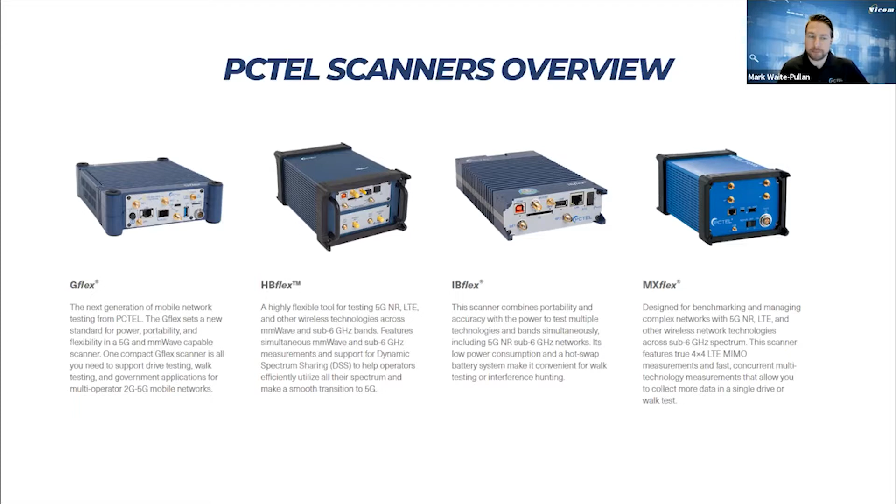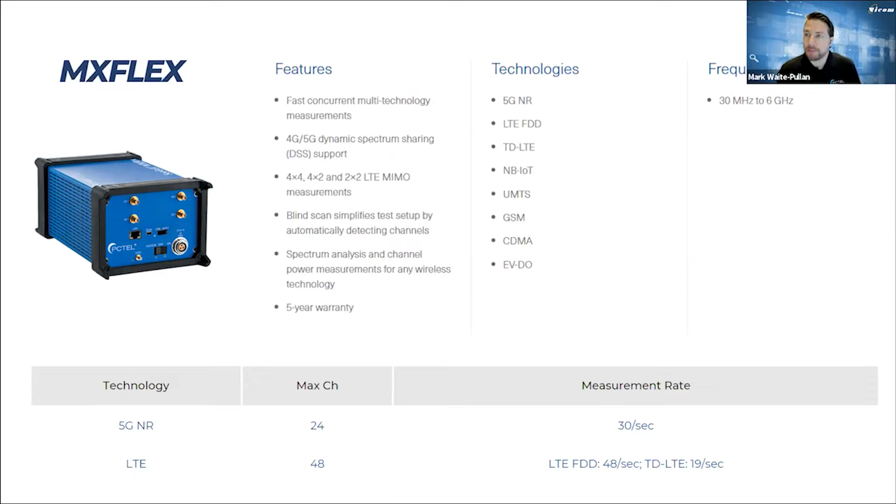So the first one is MXflex. The main thing with MXflex is it only supports 6 gigahertz down. It does support 5G, but obviously it's only going to be below 6 gigahertz. However, it does have 4 antenna inputs, so we can do 4x4 MIMO measurements. This one's particularly aimed at your cellular industry, hence no support for the public safety radio. And you can look at this measurement rate. We're looking at 24 5G carriers at one time, measuring 30 times per second. So it's quite a powerful device.

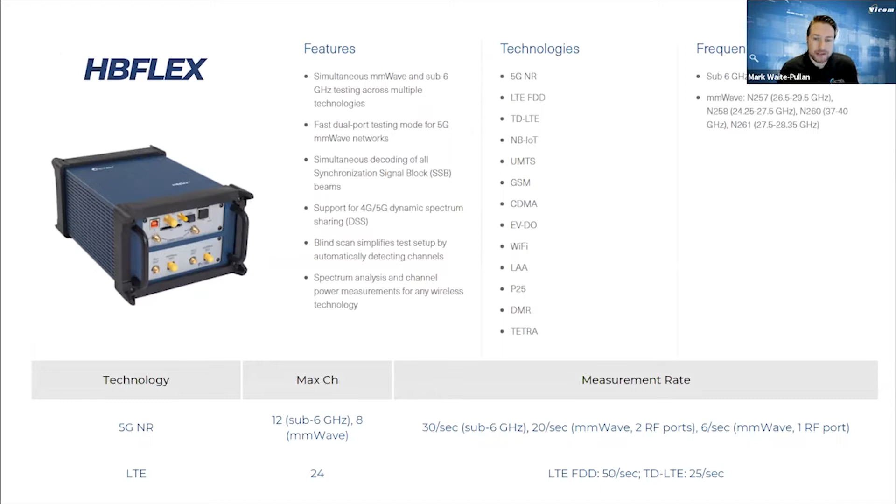HBflex. HBflex adds the public safety technologies, but it also adds extended frequency range. So now we're looking at millimeter wave. We can get up to 40 gigahertz depending on the model selected. You can see though that the scanning rate of those 5G carriers, the maximum number of channels, is lowered slightly.

And the latest one is the G-Flex. The G-Flex, this is 120 5G carriers simultaneously. If you're talking sub 6 gigs, it's doing that 33 times a second, or 25 times a second for the millimeter wave. With millimeter wave here, it is a continuous spectrum, and we can go all the way up to 48 gigahertz. So this, again, is really for your network engineer level in-building DAS market. This one does not support any public safety.

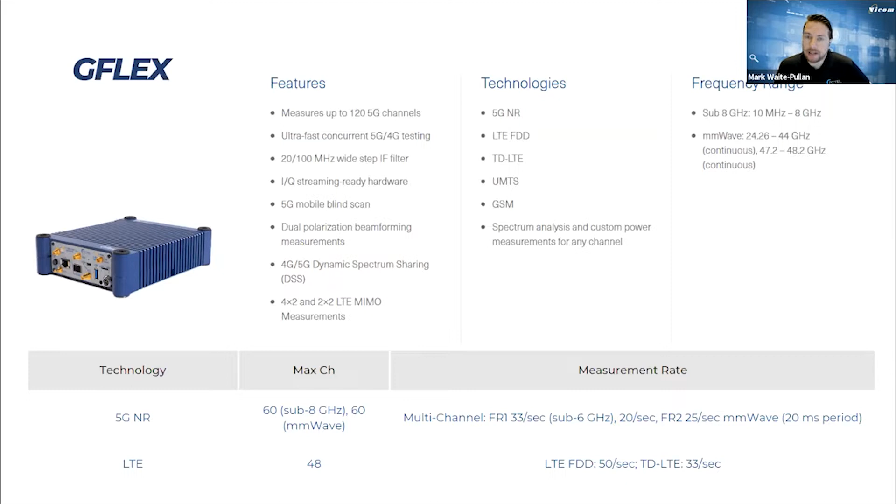Okay, so what we're looking at now is ibFlex, and this is a main product that we've been showing. We've had agencies purchase this product already, and it kind of does a little bit of everything. So it supports 5G only up to 6 gigahertz, so FR1. It supports all your two-way radio technologies, well, not all of them, but DMR and Tetra. Supports P25. We can do 4G scanning, 2G, GSM, even your digital train radio system, GSMR, CDMA.

Now it has 2 antenna inputs, so it can support MIMO as well. So 2x2 or 4x2. One of the things about ibFlex is it's very small. I'll show you my unit, which I have on my desk behind me for today's demo. Let's see if I just quickly turn my. Sorry, I can't see it because of the background. But it's a very small, compact unit. It's very lightweight to take around.

And the main thing with this unit is the amount of carriers we can support at once. So if I speak from two-way radio world, we can support 20 P25 carriers at once. So this is really the advantage of this over some of the traditional coverage testing methods we have available for digital radio. Most of those are only supporting 1 carrier at a time. So if you're walking a 60-story building and you want to look at the in-building system as well as the half a dozen macro sites that the building can see, this saves a heck of a lot of time.

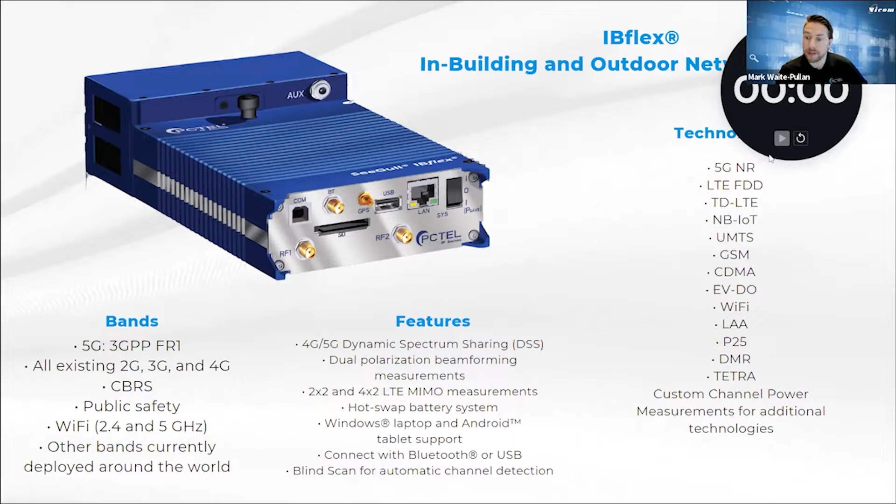So part of the PCTel range is you obviously have the scanners, which are the physical device collecting the data. Then you have the software which aids in that collection and gives you the graphical representation of it. So the first piece of software we have over here is SeeHawk Touch. So SeeHawk Touch is Android based. So you can walk around on your tablet or mobile phone, but obviously a tablet is a better viewing platform.

It pairs via Bluetooth to the scanner, so you have no cables hindering you while you're walking around. It gives you simple reports in real time. You can look at KPIs as you're walking around, and it gives you simple playback. When I say simple, what I mean is, while we might be taking samples of multiple channels and multiple technologies, we can only visualize one of those on a map at a time. You'll see when I jump into the demonstration soon what that looks like.

The next one above is called SeeHawk Collect. This one is PC based, and this is wired to the scanner, either via the Ethernet port or via USB. It gives you the ability to analyze it more in depth. So you can have multiple maps showing multiple bits of information. And it also enables automated reporting, so that the data that's collected via SeeHawk Touch can be imported straight into SeeHawk Collect, and then automated reports can be generated. We'll look at that a bit later as well.

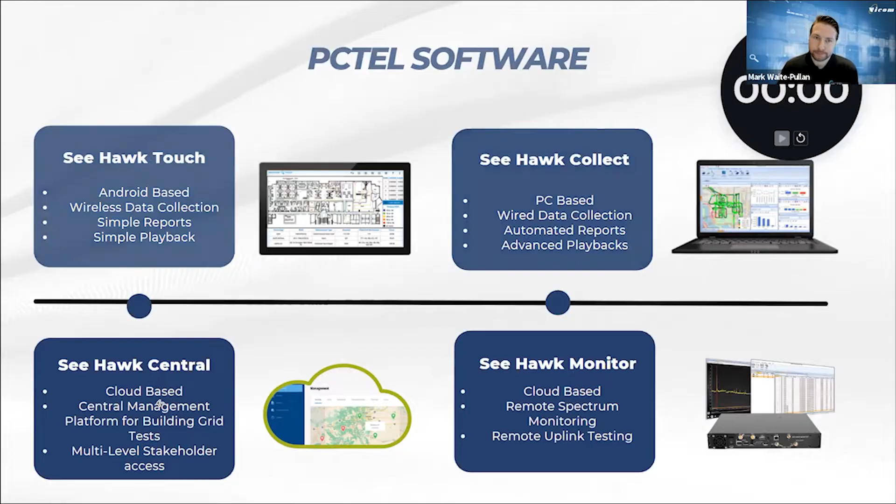Okay, so the types of tests that we're supporting with the SeeHawk software: we have the indoor tests, which are not GPS based. So this is simply import a floor plan, touch where you are, start recording. When you get to the next location, you touch on the tablet again, and it shows you where you are and populates those readings in between.

So one of the advantages of the SeeHawk indoor testing is you don't have to spend any time creating the building before you arrive. There are other solutions out there which do some fancy looking maps, but they require hours of work before you arrive at site in drawing the building in 3D and importing the plans. With SeeHawk Touch, we can just import a drawing and scale it on the tablet within 10 seconds, and we can get moving. We can even take a photo and scale that photo.

So maybe you might turn up to a facility and they have an evacuation plan. Take a photo of the evacuation plan. Then you've got your floor plan to start doing your walk tests. So no prior preparation required.

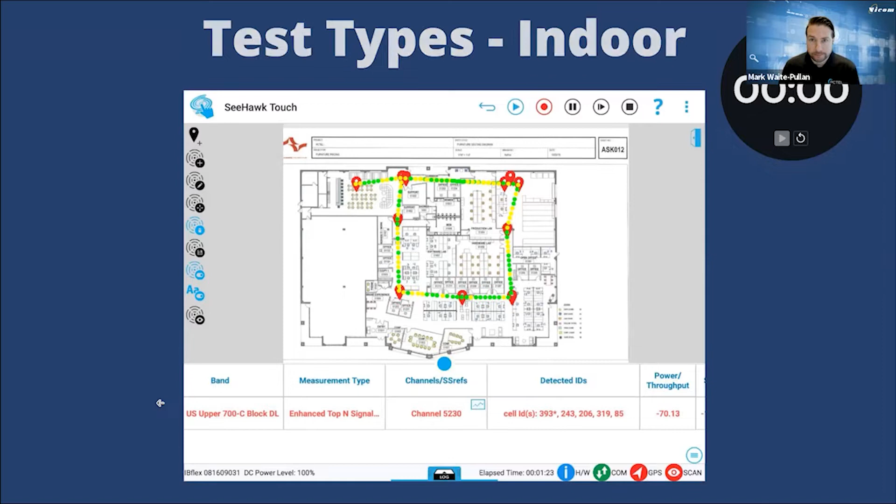We have your typical outdoor test, which is GPS. As you drive, it's going to log, plot and record the signals that you've asked it to. The speed of this is going to depend on what type of reporting you've asked the unit to do. So if we're talking about signal strength only, we're going to have very high speed, something like 25,000 channels a second it's capable of.

If we're talking about decoding, which is demodulating the signal and having a look at what's inside that signal, we're talking 30 or 40 samples a second, depending on the technology. We'll have a look at that in a moment. So moving at high speeds isn't an issue.

So you would walk to each point, press on the dot, and then it'll take samples for as long as you like. Then you add it to the report, and then it grades that square. The reason why this goes so well in the US is that a report is able to be created right there and then, and simplified for building owners to understand.

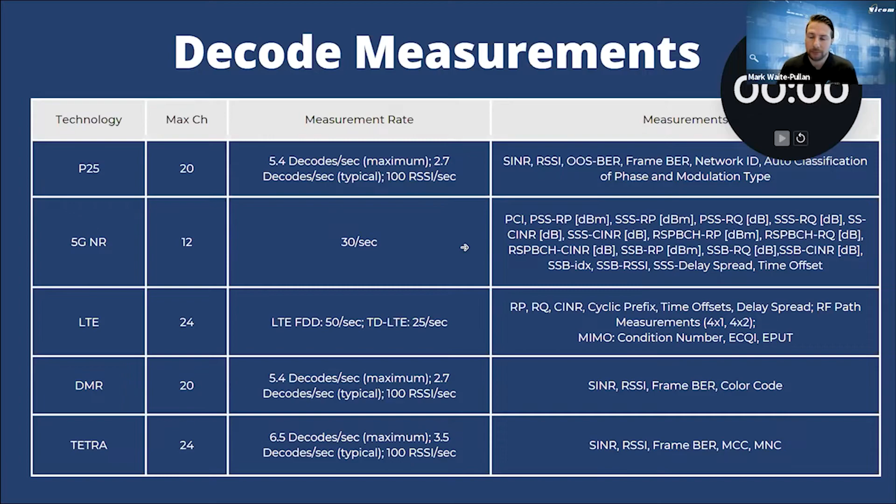So one of the things with the PCTel that is misunderstood a little bit is that it is very powerful for power measurements. So if you only want to look at the RSSI, for example, if you wanted to use this to tune a propagation model, there's no point decoding bit error rate or signal to noise, because that's not part of the model. You're only looking at the power output.

And if you're doing that sort of work, you're going to want a lot of samples to give you some confidence in your model. We can take thousands of samples a second. So we're talking on a 12.5 kilohertz radio channel, 25,000 channels simultaneously. Specifically, if we go RSSI on P25, we can look at 2,560 channels with the tablet software, which is more than enough.

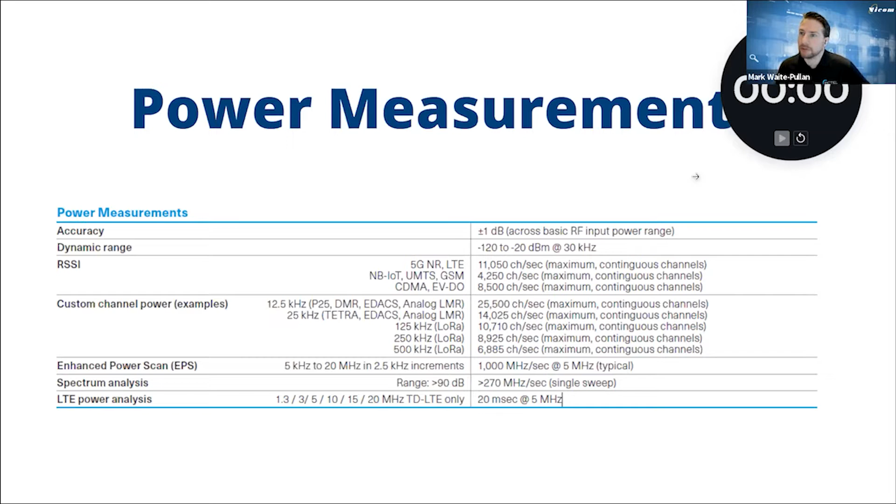So any technology that you might have that's not included natively in the PCTel to decode, you can still measure that just by looking at the RSSI. So that might be NXDN for the radio world or some other technology that's not listed here.

Okay, one of the things that sets the PCTel product apart is Blindscan. The idea of Blindscan is when we're looking at the cellular carriers, we might be a radio professional who's been asked to evaluate the 4G coverage in a building. Or maybe we're looking at installing cellular boosters, which are becoming quite popular in the industry. Maybe we're doing a larger micro cell installation. We need to have a look at what coverage is already there from all the carriers.

Blindscan allows you to select the band and the technology. So you might select LTE for 4G and band 28 for some of the Australian frequencies. Blindscan will then run in the background and it'll tell you the frequencies that those services are on, the bandwidths. So then it can set up the measurement for you without you knowing which specific channels are active and the bandwidth of those channels. The table I've got up here is just explaining the Blindscan modes.

So blind scanning takes time. So the PCTel has a high-speed mode. The idea of the high-speed mode is I can put it in my unit and I can just start walking around and scanning the entire coverage area for what services are there. However, it's not going to pick up really low signals. It's going to favor high signals better than -85.

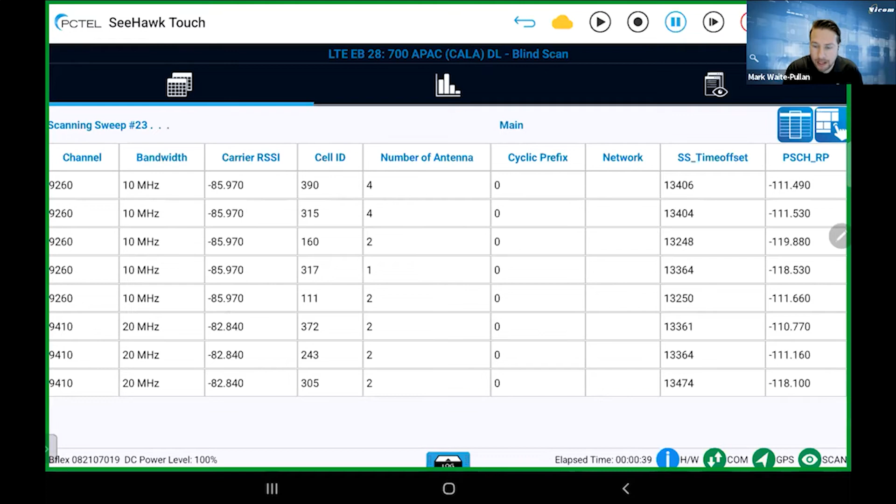We might want to have a look at this in a table form. So I've got all my green channels, which are Telstra, and I've got all my blue channels, which are Optus. I can look at it as a scan mode or just a summary. So it's not moving all the time. It's just telling me which ones are the better ones at this point in time.

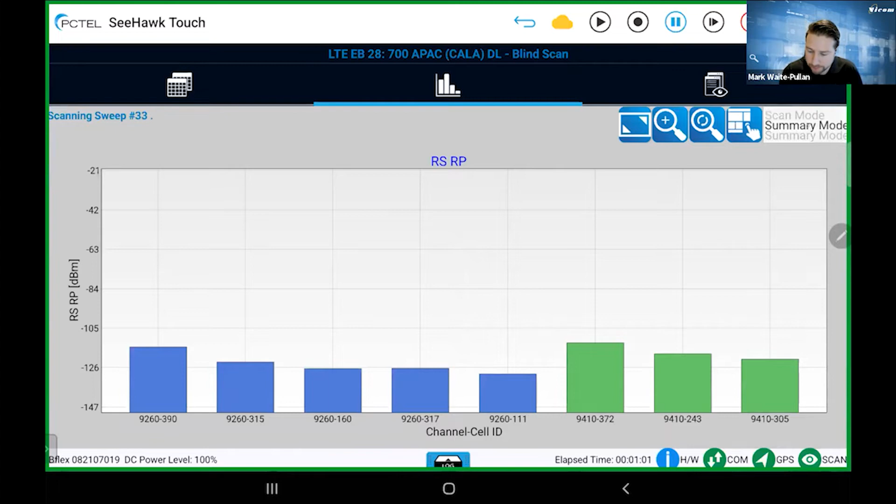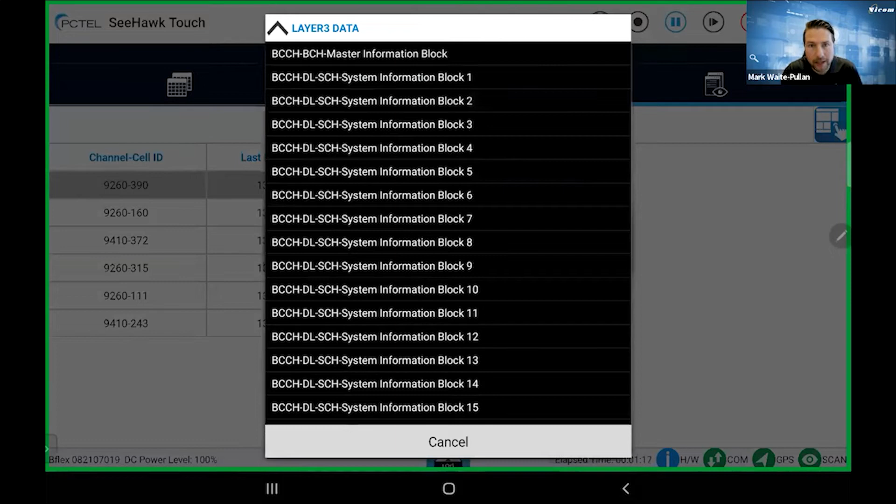How do I know that these are Telstra and Optus? If I look at the data, so this 9260 channel here, I can look at the data and I'm getting all the data blocks from that carrier as well. So in block 1, this is where you're going to find the MNC. So number 2 in Australia is Optus. So that 9260 channel is Optus. That 9410 channel, that's number 1, that's Telstra.

Okay, so this has told me what channels I have in the area on that band that I've specified. Where blind scan is really useful is if I stop this now, it's going to ask me if I want to save it. I don't. I'll delete that.

Now the Blindscan wizard will basically automatically set up my tablet to go and do a full measurement of my Blindscan results. So it's going to say, well, here's your detections. And I detected this channel here 54 times and the other one 53. So I might have 20 channels that appear, but maybe I only see 1 or 2 times out of the 100 scans I did. I can then filter that based on, hey, show me only the ones we saw 54 times.

So if I need to get my list smaller I can, but what we're going to do, we're just going to select them all. So just tick that box for the entire band and apply. It's taken us back to the measurement screen. Doesn't look like anything's happened, but if we actually look on this measurement tab, you can see it's now set up the proper channel number, the proper bandwidth, ready to go for the measurement.

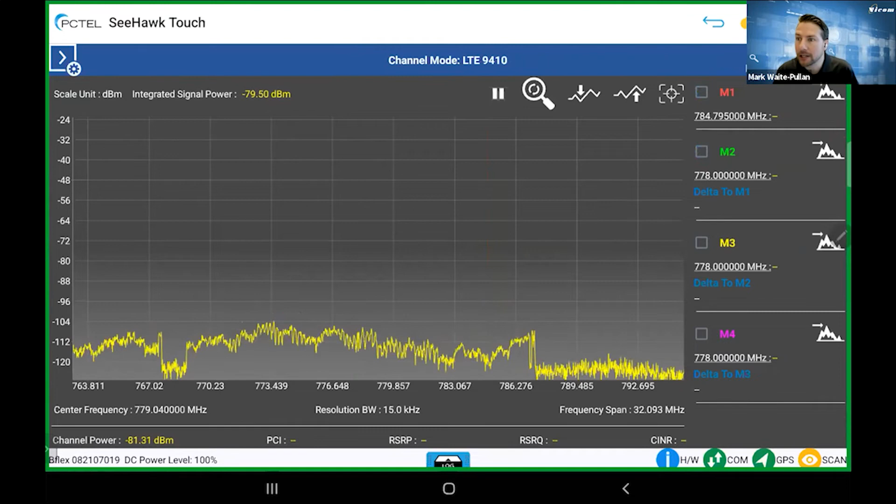Okay, I'm going to stop this scan. Okay, we're going to go back to our main screen. So these are how you set up your measurements. There's a lot of other options, depending on the technology. So if I take P25, we don't have bands as such for the radios. So we have to put a frequency list in. There are two ways to do this.

One is I can put a frequency list of uniform, which is start at frequency X, have a 12.5 kilohertz span, and then say how many channels we're going to go up to. So for P25, it's 2,560. So then it's automatically created this channel list for me. That might work if you've got the whole block to yourself, but that's generally not how two-way radio is licensed in Australia.

So generally what you want to do is a non-uniform. With non-uniform, you start by adding a frequency, giving it a channel number, and then putting in what that frequency is. A lot of the operators are going to have quite a large list of frequencies for the two-way radio technology. So you can simply import a channel list. So I've got this P25 list here, and the CSV is as simple as channel number followed by frequency. So these are all the channel numbers and the frequencies. If I hit import, it's going to bring them into my channel list.

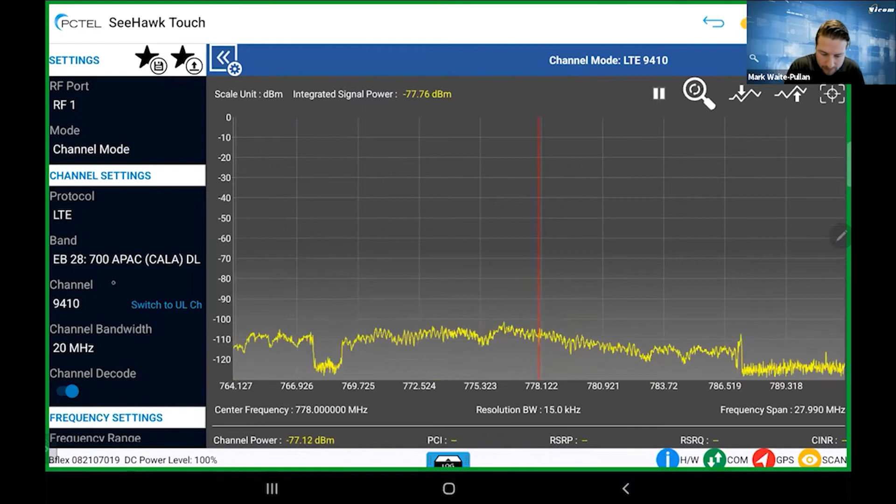Also, while we set it up as well, you can have a look at the spectrum analyzer and have a look at certain channels while you're setting it up, by selecting which type of protocol, which channel. Obviously, I'm inside here, so I'm picking up nothing.

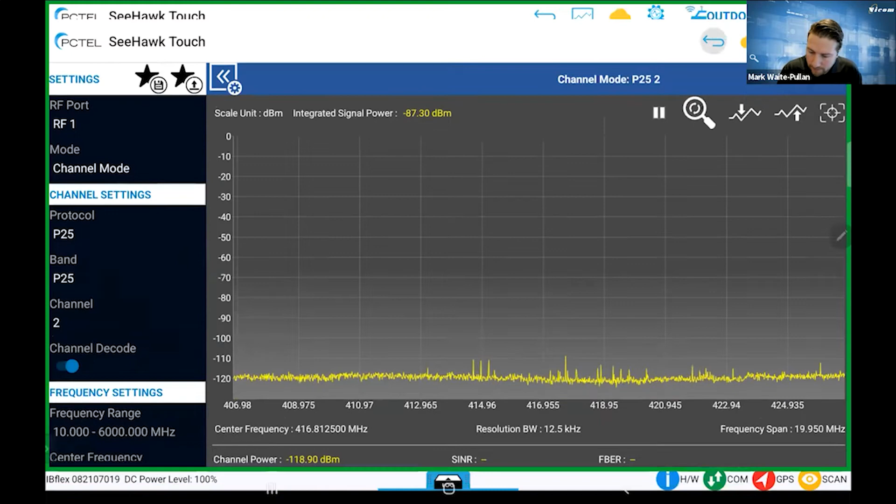Okay. So what I will quickly do is show you some tests. So once we've collected all this data, how can we look at it and analyze it? On the tablet, it's kind of simplified. So I've got a drive test that I've done here. I've got two options. I can play it back, or I can just have a quick view just to get a quick report on a particular parameter. So I'm just going to hit playback.

And these are all the services I was looking at in this particular drive test. So this is going to ask me which one do I want to see. So I might say I want this DMR system. You see I've got 5G there. I've got 4G. I've even got the train rail system because I was close to a train station. Okay, I'm going to look at the bit error rate of this DMR channel.

So here's my view. The blue is the route I took while I was driving. So I've got a mix of freeway driving at 110 as well as around residential areas. So I can select down here the speed that I play this back at. So we're going to go 8 times the speed and we're going to hit play. So if I drag this dot up, you can see my table of all the measurements that I'm taking and how quickly they're being plotted and sampled.

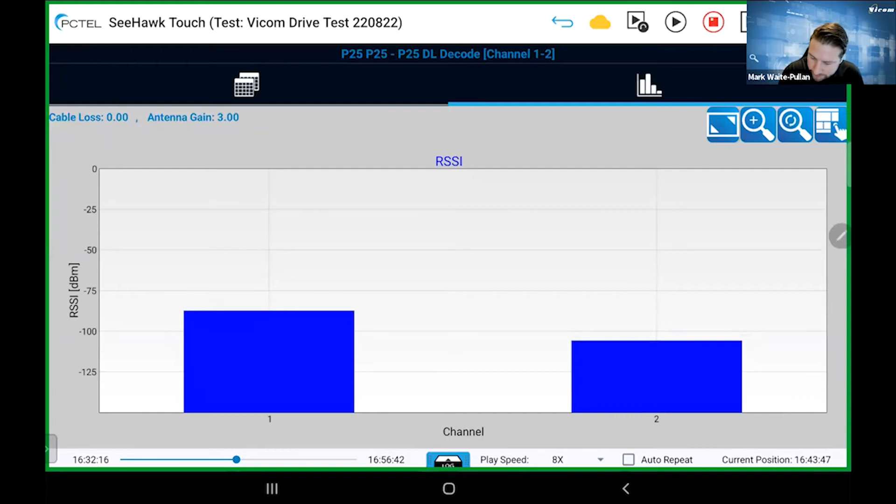One of the other things we can look at is just do a quick view. So let's say from that drive test, I want to know what the 5G signal was like. I can now select my 5G. And you can see the amount of items we can look at when we're looking at a 5G signal. I want to know what was the best serving cell ID and what was the beam index of that cell.

And I want to label that. Well, I'm not actually going to show a label on this one. You don't have to show a label. If you want to do a report to show a client, sometimes the labels get in the way.

So what we're seeing here is I've got nice multicolored dots. If we click on my key over here, we're getting the key. So the best serving cell ID was this light blue one here, 732. And then inside those dots is the beam index, so which beam was serving that particular area. So you can get quite detailed.

If you wanted a very simple view of the overall coverage, this is a very simple view where you can take a screenshot and then send that to, maybe it's not for a client. They're not paying for a report as such. They just want to know that there's coverage, or you're verifying the network that you maintain for them. This may be more than enough just to take a screenshot.

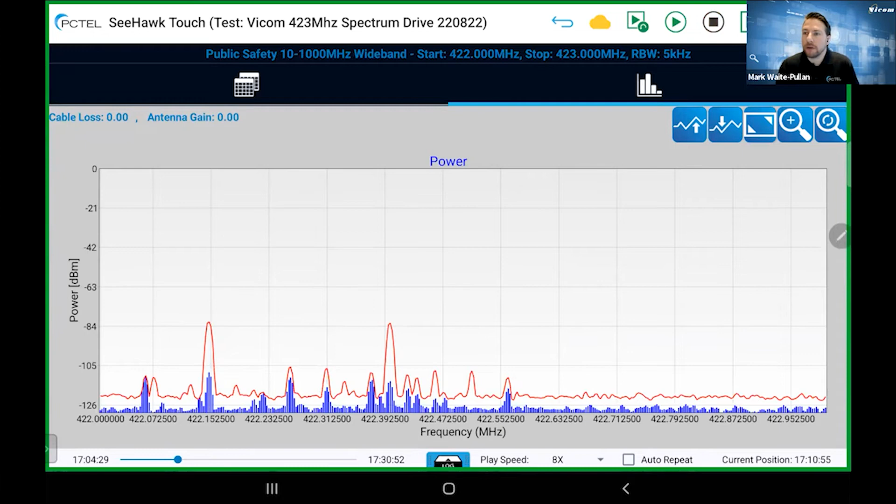So that's just to give you an idea of how many channels we can handle at once. So you might have an analog system, a voting system. You might want to analyze all 20 of your analog voting channels. We can do that quite easily.

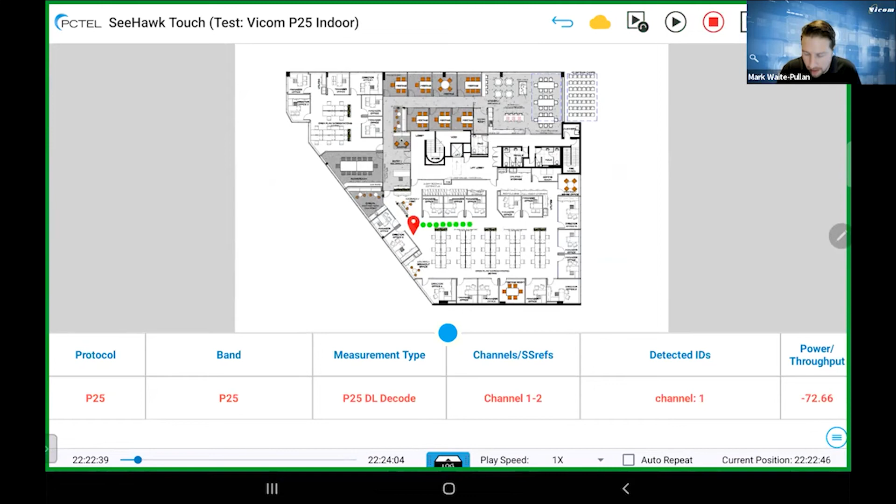What I'll do is I'll show you some indoor testing. So this is an indoor test. So we're going to do playback of this one. This is 2 P25 carriers. This is not a real indoor test. It was just simulated. Okay, so I've hit play there. You can see as I do the walk test, my readings being populated. Again, that's nice. All we're doing is tapping where we are. So those markers are my check-in points.

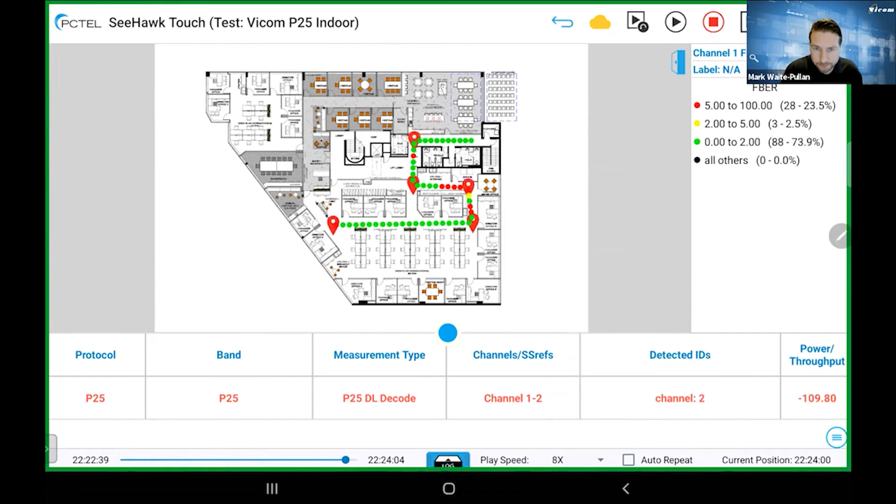If I speed that up a little bit. So now I've changed the signal that I was generating to get some bit error. So you can see my points as we go along. So that's your walk test indoor. Nice, easy to get going.

All right, what I'll do is very quickly show you a grid test report. So for this, we're going to go to our device list. One of the things you can do is, once you've saved all of these settings, you might want to use them, or you might want to share them with someone else who needs to quickly set up this tablet. If you're doing a lot of carriers, that can take some time. What we can do is we can load a workspace. Says, hey, do I want to get rid of these measurements? The answer is yes.

And now I've got different workspaces ready to go. So I'm going to do this one here with no 5G. And if I look at my measurements tab, all the things I want to look at are saved here, ready for me to go again. So if you have a particular building, repeating the test is very easy. Once you've done the initial setup, you can go back to site, recall the workspace, and off you go.

So we're going to quickly do an indoor. So it's going to ask me, what do I want to plot? Now, this is going to be interesting because I'm not going to have much signal at home. Okay. Oh, sorry. We're going to do an indoor grid test, aren't we? All right, so now I've got my choices. I can have a map file that I've already set up and saved, or I could just load and register an image. So I can take any image that I've downloaded to the tablet and then register it. That's what I'll do actually.

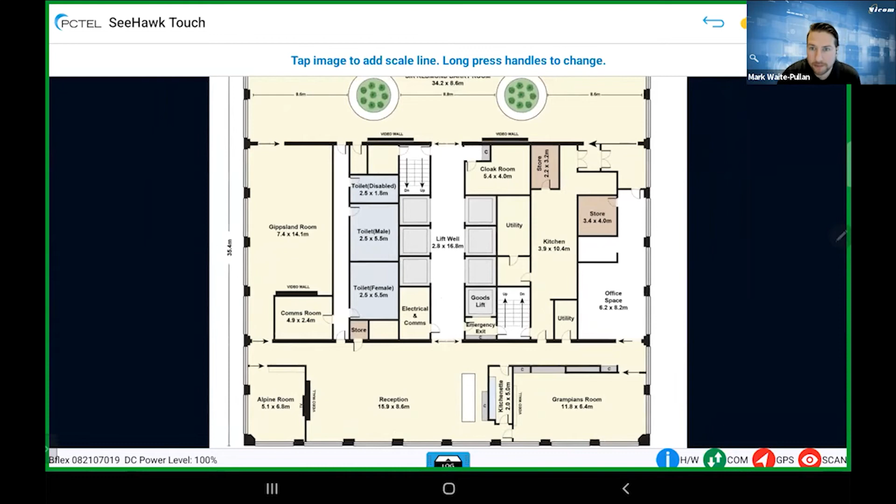Manual is putting GPS coordinates down. So even though you're doing an indoor test without GPS, if you know GPS coordinates, then you can do that indoor test and get GPS coordinates in your CSV when you export it. So here's an image here. The next thing it's going to ask me to do is to click somewhere on that image and scale it. So I'm going to find a measurement. So this comms room here. I tap on it and then move the other end. According to that drawing, that's 4.9 meters. Click on it again, set my scale.

Okay, so my maps, that's all I need to do to get my map. Since this is the grid test report, I'm going to give it a name. So I'll just call it test. Then we're going to look at the criteria that we're going to allow to pass. So if we're measuring RSSI, we want to do average or maximum or the first signal. So for each technology, you can choose whether it's average. I quite like average myself, but some people might want max. Depends.

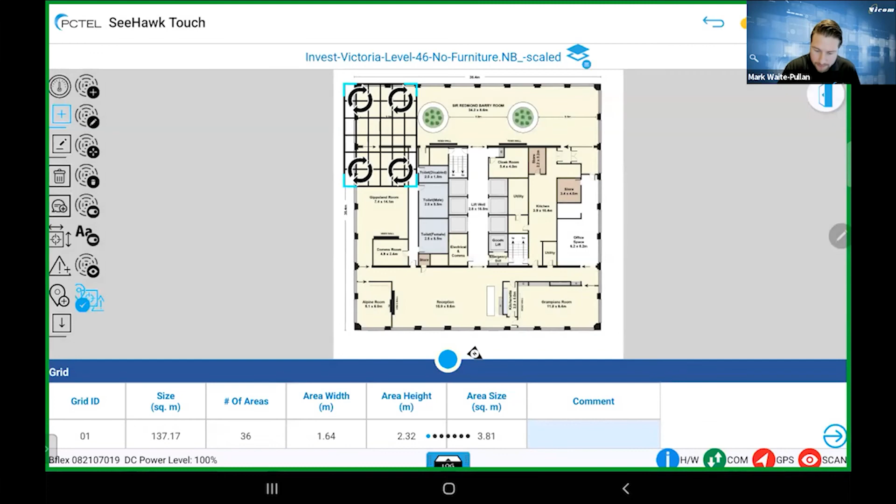Okay, so now I've got my image here. I need to put a grid on it. So I can quickly go and add a grid. It's going to tell me how many columns, how many rows I want. So maybe I want to go 6 by 6. And now I can zoom that grid, place it over my building. Okay. And it's automatically created these grids for me with test locations.

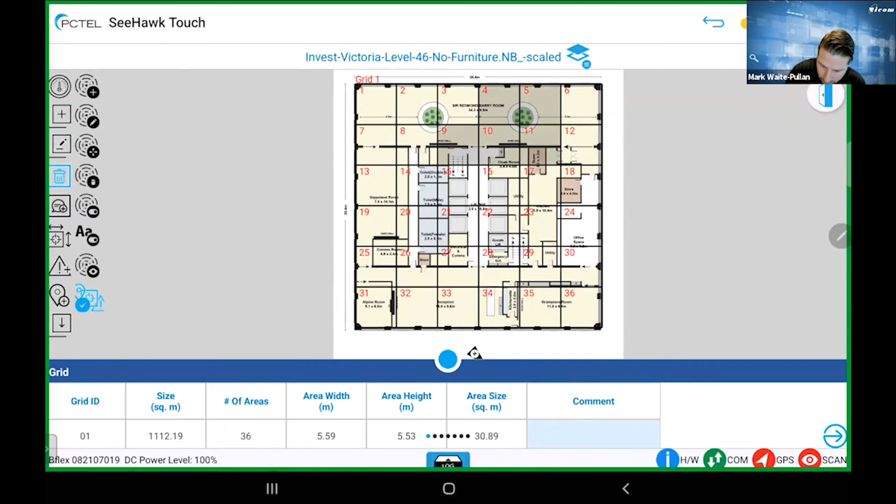Maybe for some reason there's areas I can't test, but we don't want them showing as a fail. So we can delete them. So if we go over here, select delete, I want to delete these ones here from my report for whatever reason. Okay, and maybe when we zoom in on some of these measurements, I can't take this measurement in the middle of the lift shaft here, so I want to move my target. So, okay, that's where I'm going to take my measurement.

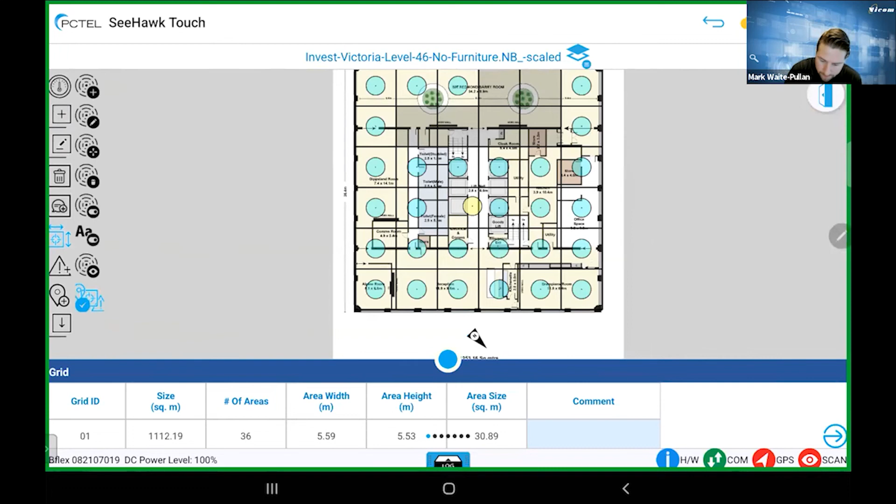So once we're ready to go, we actually select the measurement here, and all we do is tap on the circle where we're going to make our measurement. Okay, it's highlighted. And then up here, we press measure. So that's now looking at all of those technologies and picking up measurements for all of those. It's now placing those measurements, telling me if it's ready to add to the report and the amount of measurements it's taken of each of those. Again, these measurements are very low because I'm in terrible coverage.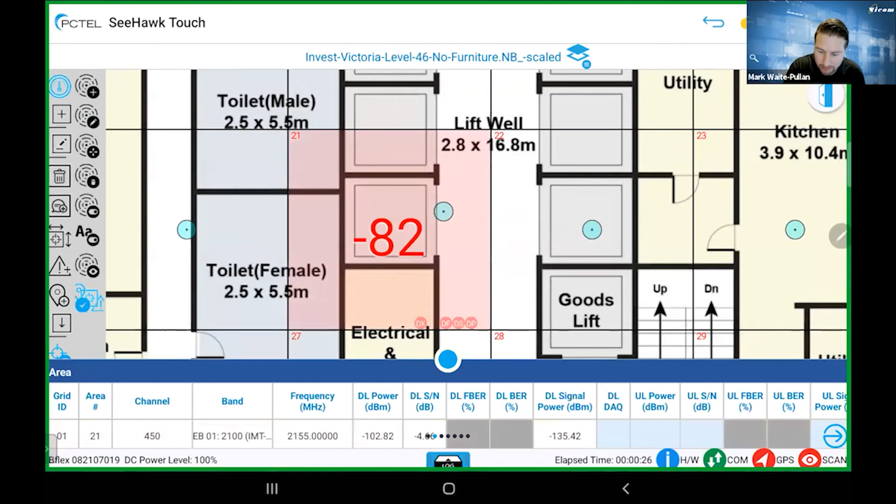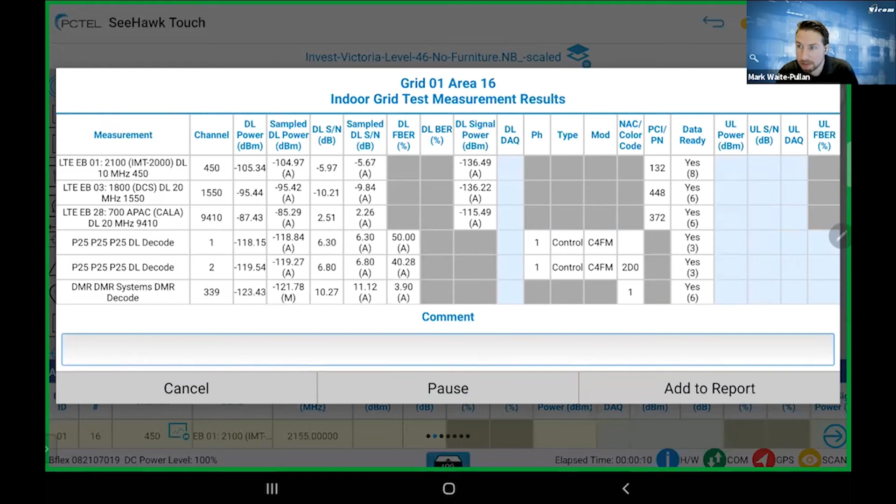Once we're happy with the amount of measurements we've taken, we just hit add to report. Okay, so that is showing me that area has failed. So basically you just replicate that across the report. So we get to our next point, we run the test. Add to report is grayed out because we don't have enough data yet to do it accurately. Okay, now we've got enough data and enough samples. We're going to add that to the report. So that's basically grid test.

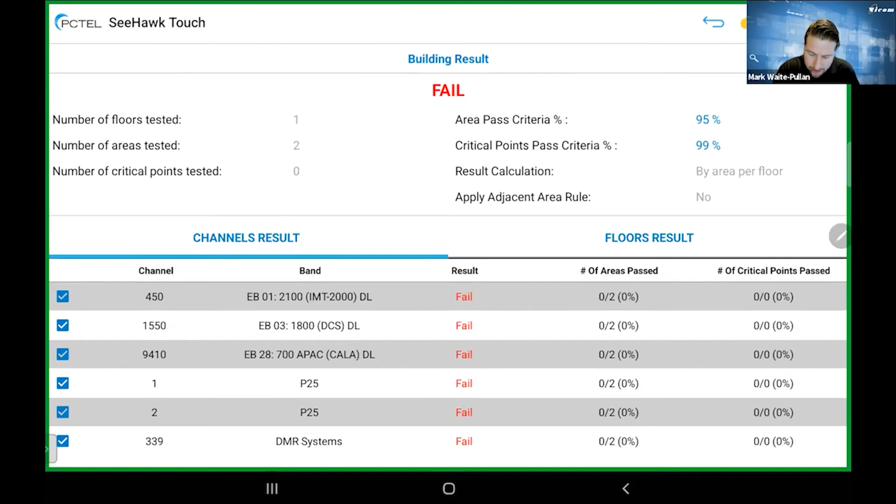You can add more floors as you go. Select another floor if you want to add another one. But you can do a building report right from there. So right now, this is showing the number of floors I've tested, the areas I've tested, and its pass rate. And then it's breaking it down into each technology. We can also export that directly to Microsoft Word. So if we hit generate report, it'll generate that in a Microsoft Word document.

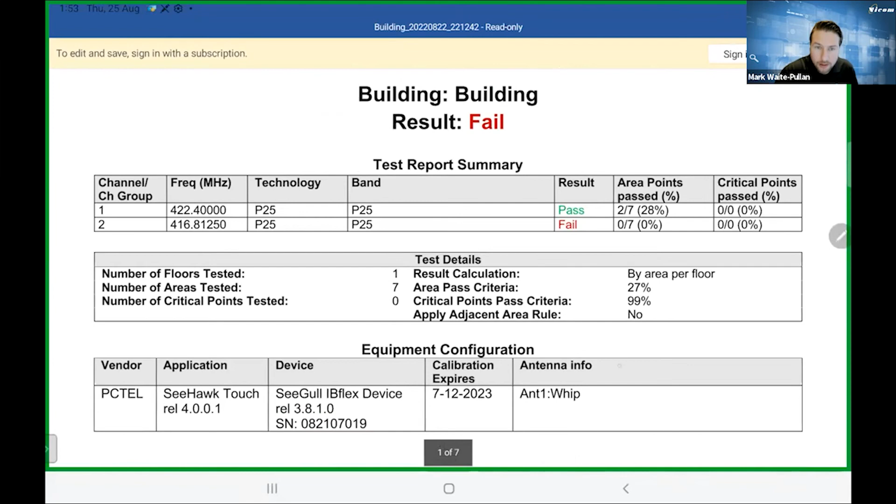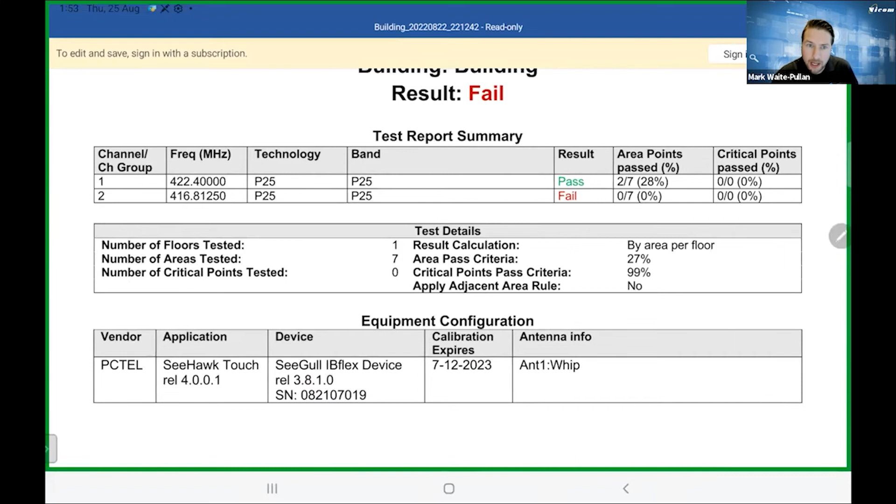What I will do is I'll quickly show you what one of those reports looks like. If I go to my files, I go to my indoor grid report. And here's one I've created earlier. And it's got all the details of my device, the serial number, even the calibration date of the unit, very important if you want to do a report that needs to get some sign off. And you can see the results of this particular test.

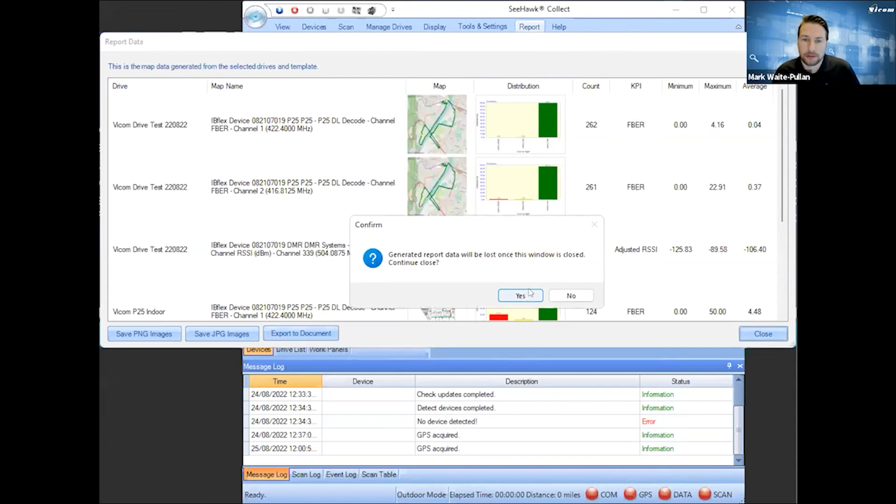Okay. What I'll do now is I'll just quickly share with you my screens for SeeHawk Collect. So SeeHawk, we're sort of running out of time here, so I'm just going to show you a very quick example. So SeeHawk Collect, I've still got it open from before. Okay, so SeeHawk Collect is the PC-based software. So you can have this connected to your scanner and be taking measurements through here like we just did with the tablet, or you can use it for post-processing.

So I might be looking at my drives. You can export them from the tablet directly. I actually use a Google Drive to do that. It keeps things nice and easy. This Spectrum drive, I want to play that back. When I play it back, I can choose, I want a map, and one of those maps is going to show me the frequency of that particular one with a label. I want another map, and on this map, I want to see the greatest RSSI, and I want to label that with what the frequency is.

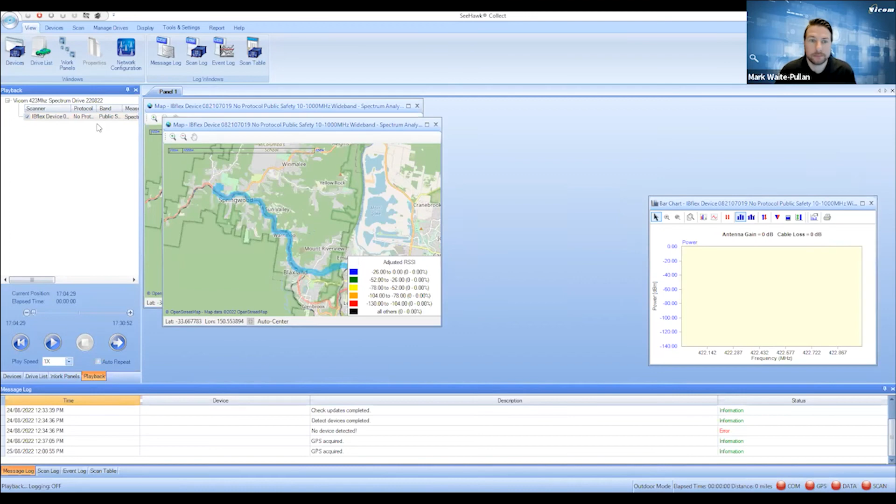Maybe I want to see a bar chart view of that spectrum. And maybe I want a history chart. We can quickly arrange them in a nice pattern.

And if we hit play, you'll see the results of my drive test. So I can further analyze these a little bit deeper. We can even look at this as a contour chart or more of a spectrogram style chart. So this is kind of more for in-depth analysis from an engineering point of view.

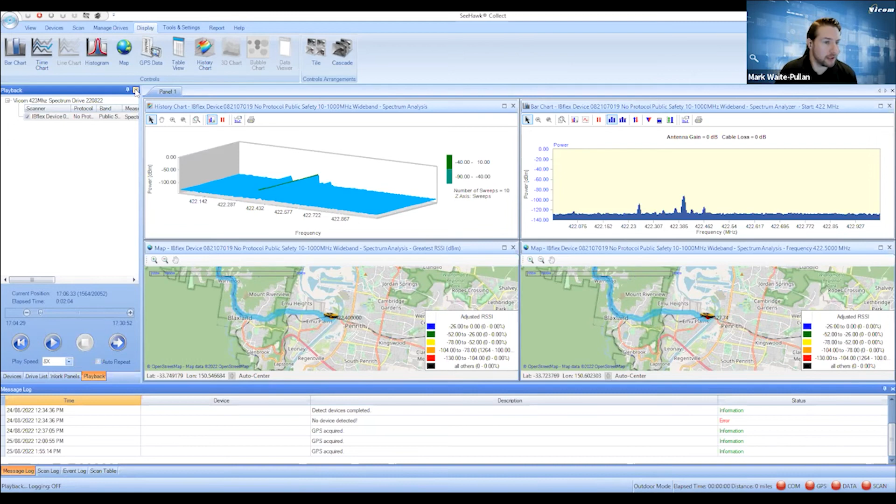Another good example of that is if I cancel this playback here. Let's look at this P25 indoor playback. I can then look at different elements within that reading. So I might want a line chart for my signal to noise, choose which channels I want. Also, I'm going to want the map, and maybe a table view. Hit play.

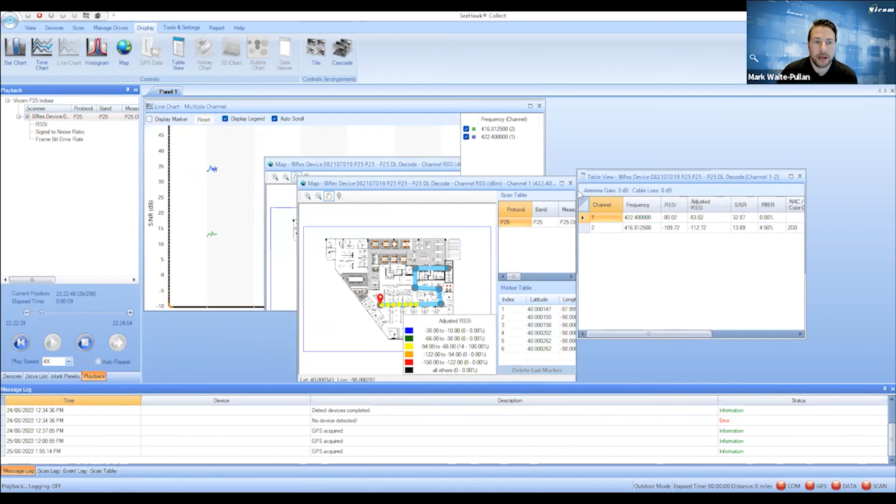So I can look at my walk test. And we can see my relationship to signal to noise ratio. So on this one, I had a test set where I was turning a carrier on and off, and you can see the relationship between the signal to noise.

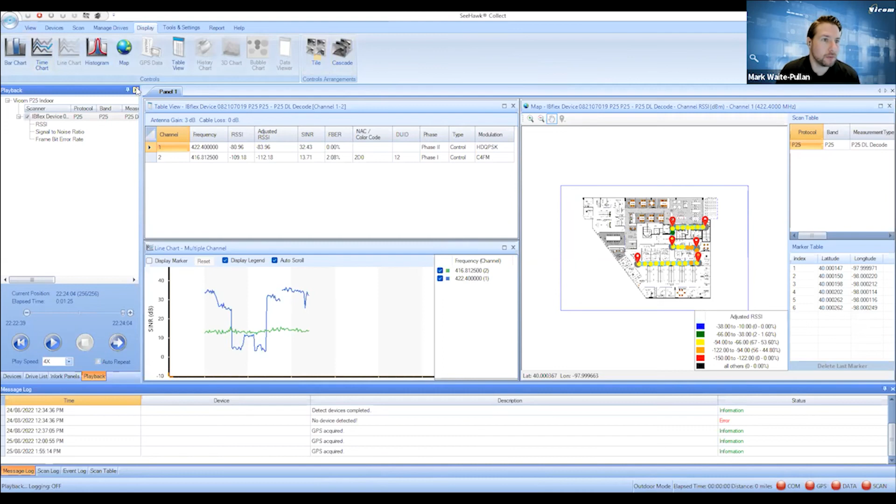The very last thing I'll show real quick on SeeHawk Collect is the ability to do reports. So I might open up my SeeHawk Collect and I just want to generate a report. I can select the drive test I want to do that report for. So maybe these two. Generally, you'd only be doing one at a time, but maybe you've done 20 floors in one building with the same parameters. You might highlight them all together.

So when we go into next, it'll give me the technologies that were on those drives. And I can choose what part of those drives I want over here. So maybe I want my P25 decode for channels 1 and 2. Maybe I want my DMR decode, and then I want bit error rate. And I want that channel. And maybe I want my LTE, and I want the best serving cell for LTE.

I can edit my legends for what my scales are going to be. And once we've done that, we can save all of that as a template. So next time, we just load the data, hit generate report, and we're done. So we're going to generate that data now. It's asked me if I want to save this as a template. I do not. So now it's calculating all that data between those two drives and giving me a report.

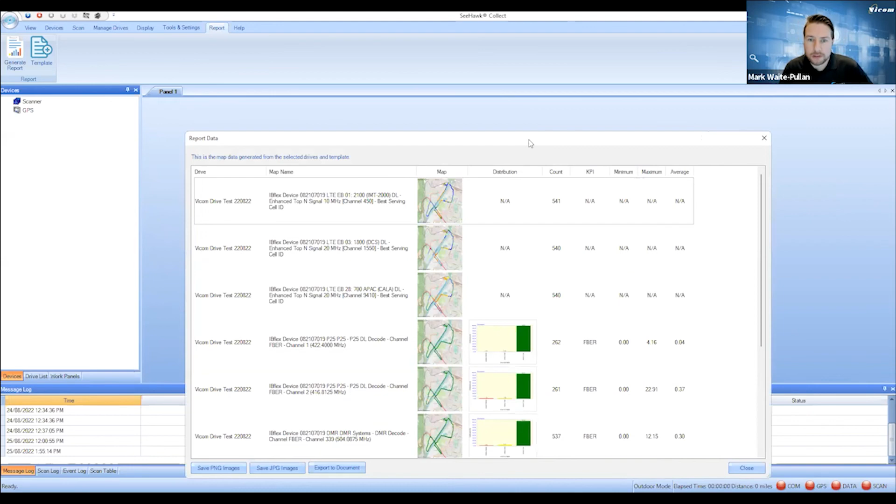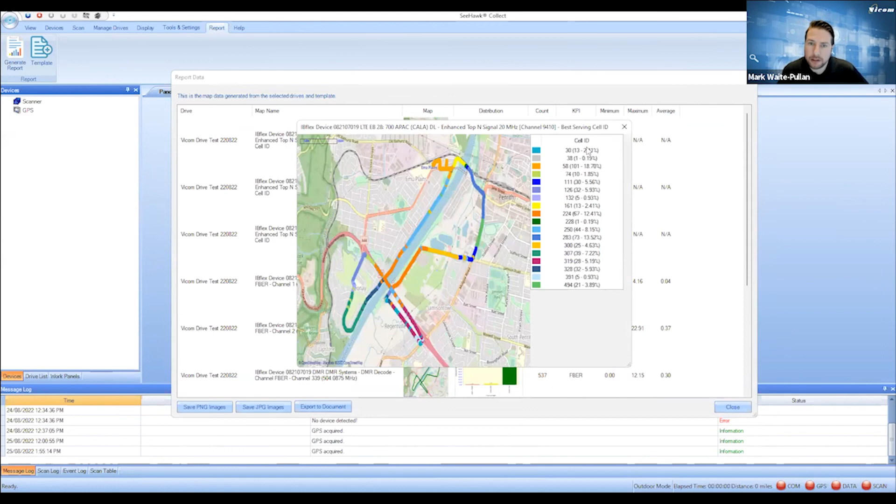And then last, we can export all these images and save them separately and copy and paste them into our own report, or we could export to document. And when we export it to document, it'll generate a Microsoft Word document, and it's template based. So then all that stuff comes in automatically, the scanner ID that we saw before, and the calibration comes in. They are Microsoft Word templates, so you can drop in your own logos. You can change what data gets put in there, but it's just using a Microsoft Word template.

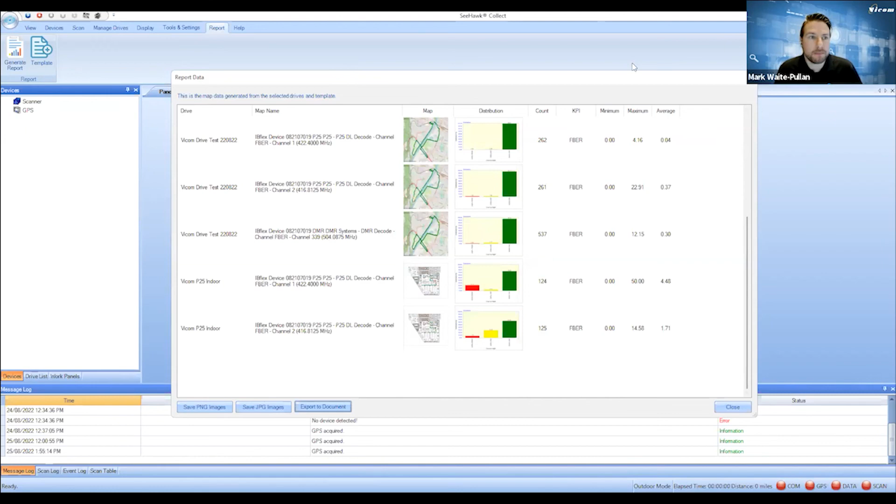Okay, I think, look, we're getting right on the hour there. I know this is a bit of a general overview of what the product can do. Obviously, for each use case, it's going to be quite different how you run it.

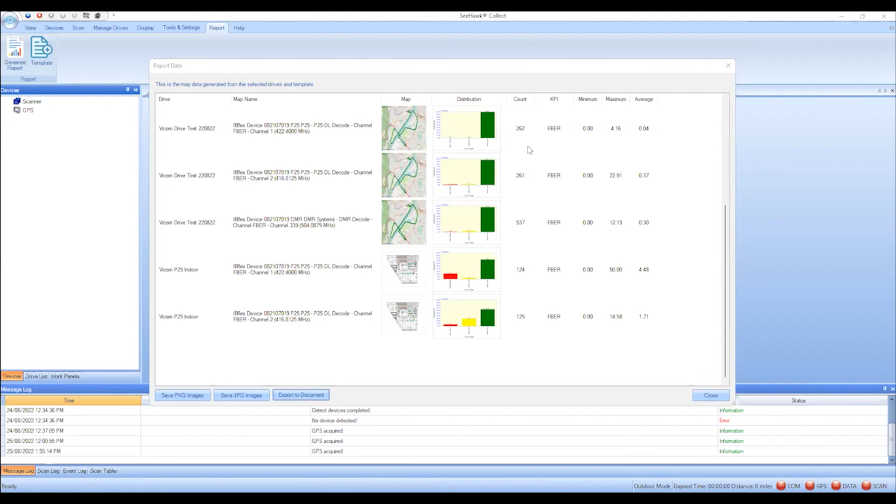What about 5G Blindscan? We had issues. Okay, 5G Blindscan does work. So that's how I picked up the 5G signals in my drive test the other day. The difference with 5G Blindscan here is you have to select the bandwidth. So with the 4G Blindscans, you'll be able to just select the band and that's enough. With the 5G Blindscan, you need to select whether it's 15 or 30. If I just pop back over to the tablet here.

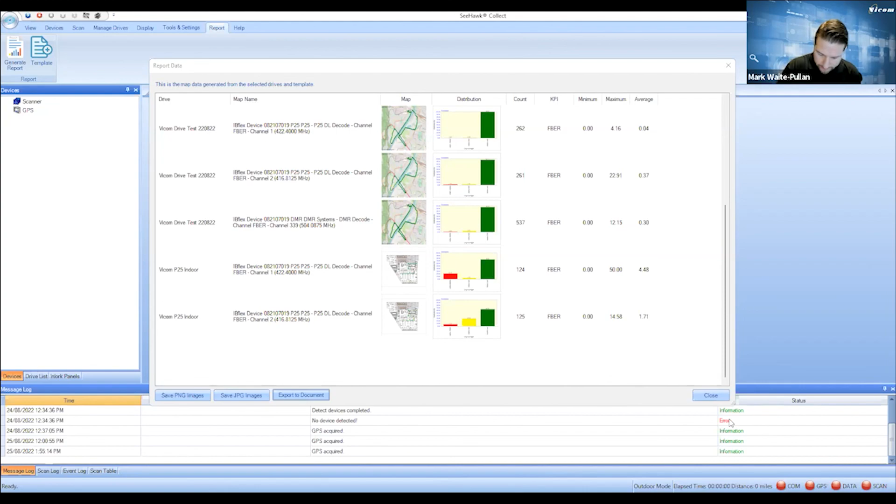Just for some clarity, they're saying that the problem was that some carriers were not detected. Okay. Obviously, I can't give an answer on that specifically, but if you want to let us know which carriers you had the issues with, we can look further into that. So if we're looking at the 5G NR, with the Blindscan options, you can see on the tablet it's 15 kilohertz or 30 kilohertz. But yeah, if you want to send us some information about what you were looking at and what the issue was, we can get some answers for you.

Thanks, Mark. There's actually another one that's come through. Post-survey correction. How could that be done? It cannot. So while you're doing an indoor test, you can always go backwards with your markers. So if you drop a marker in the wrong location, you can undo it. But once the survey data is done, that's it. It's plotted exactly as it was.

I know there are other tools out there that allow you to adjust the path you've walked if you want to straighten it up and make it a little prettier. PCTel don't have that ability. This is actually what was measured as it was on the day. They're saying if the GPS is incorrect, being put into the indoor map. So if the GPS is incorrect being put in? Yeah. I'm not sure if you can modify that after. Again, I'll have to take that question on notice.